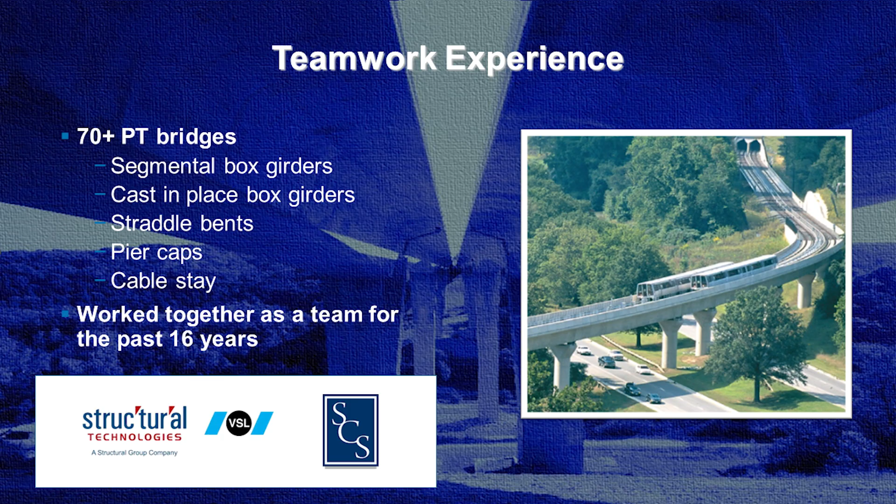So overall team experience, myself personally, I've been dealing with these kind of structures for about 4 or 5 years now at Burgess and Niple. Dallas here has a wealth of experience with over about 15 years with all these different structures, and the testing is what we're going to show you, inspection, construction. He's worked with a team of experts on this for years now, and on these particular bridges we'll be talking about today in these case studies, our team consisted of B&N, Structural Technologies, and SEVA Corrosion Services.

So with the scope of services, in the first phase, there were 11 bridges total that we looked at. What we wanted to do with those 11 bridges was an assessment based off of inspections. So we did visual inspections, kind of what you would do with a normal routine or in-depth inspection on a bridge, to determine which bridges we were going to take further into those other phases and do testing, NDT, and invasive testing.

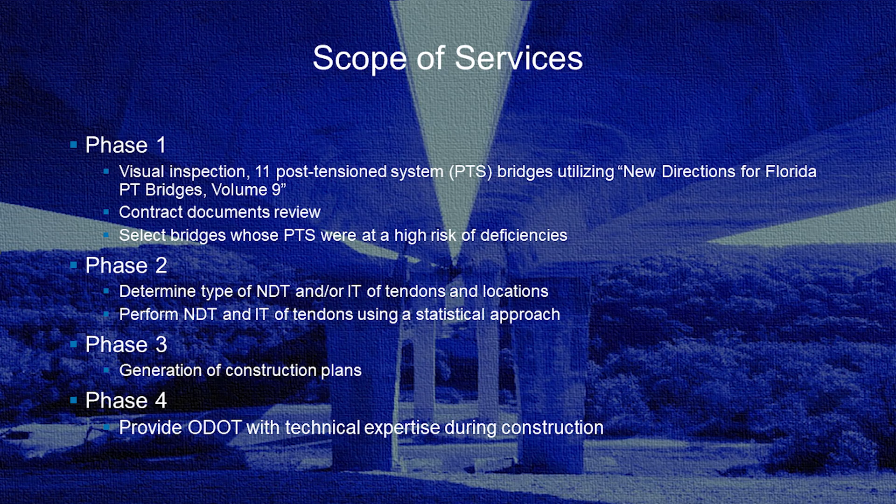And that led to phase 2. So after we picked those 4 bridges for that testing, we went on and did generation of construction plans for rehabilitation. Then after that, we also provided expertise on the construction process during the repairs of each of those bridges. This slide just shows you the 4 different structures.

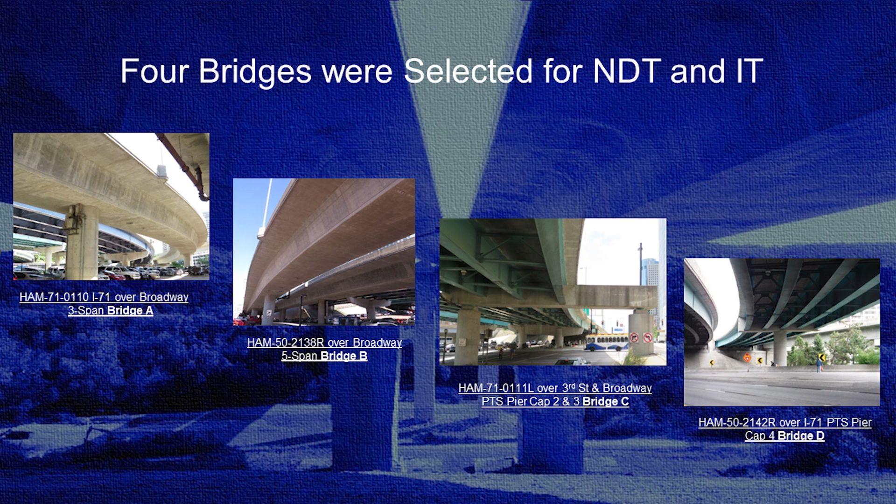I will be talking about bridges A and B, which are post-tension box girders, 3 spans and 5 spans. And then there are also a couple of structures that had post-tension pier caps that Dallas will be talking about more. These bridges are all located right in downtown Cincinnati.

Cincinnati Red Stadium is right there in ODOT's Ohio Department of Transportation's District 8. So I'd also like to thank ODOT for this project and this opportunity to work on it. Brandy Collette, the district engineer, was a big help in the whole process of developing this project and working with us. He was great as well.

So here, this will just show you a breakdown of the post-tension tendon profile on one of the bridges. This is the 3-span bridge, Bridge A.

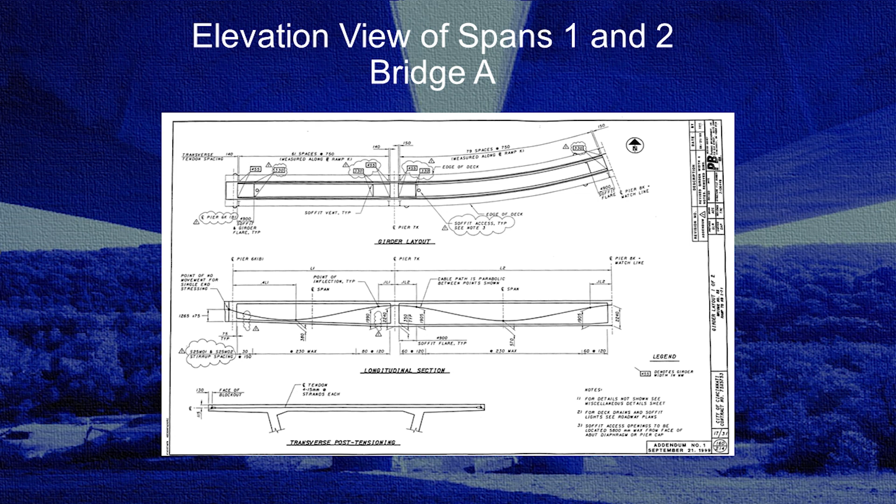So what I want to highlight here is if you look at where the pier would be, where that high point of the tendon profile is—when I get into the testing phase and explain it, we try to get as close as we can to where that high point of the elevation of that tendon profile is. Also, we do the same thing at the anchor. The anchor isn't as high as where it is over the pier, but we try to get as close as we can. You can see the highest point is actually not even accessible because it's right below the deck, right where that pier diaphragm would be.

Now, why we do this is when they're grouting, they start from the low point and then push it up. So where your voids and problems are going to develop is right at that highest point where air pockets can form. And it's right below the deck where cracks can occur and cause moisture infiltration of different contaminants into that duct area, causing your issues if you do have voids in the grout.

The other thing with the pumping process is ventilation. I don't have the vents labeled here, but nowadays they want to try to vent it properly and put one on each side at least, so two vents. In the past, they've only used one vent, and the problem with that is if you pump it over that hill, you just have that one vent, and you're not sure if you're completely filling that air pocket up there—you just don't know unless you actually check it.

And in the past, they haven't checked it, so that's why we focused our testing in those particular areas. Getting into the testing process, we're on the inside of these bridges now. This is one of the box girder bridges, and on the left picture you can see yellow lines.

We use a handheld GPR unit to lay out where the rebar is so we don't cut into that reinforcing steel. The red line highlights where the crimped steel 4-inch diameter duct is, and we try to pinpoint the center line of that duct. Then, on the right picture, after we find the duct, we avoid the rebar and drill all the way down into the duct in the web wall.

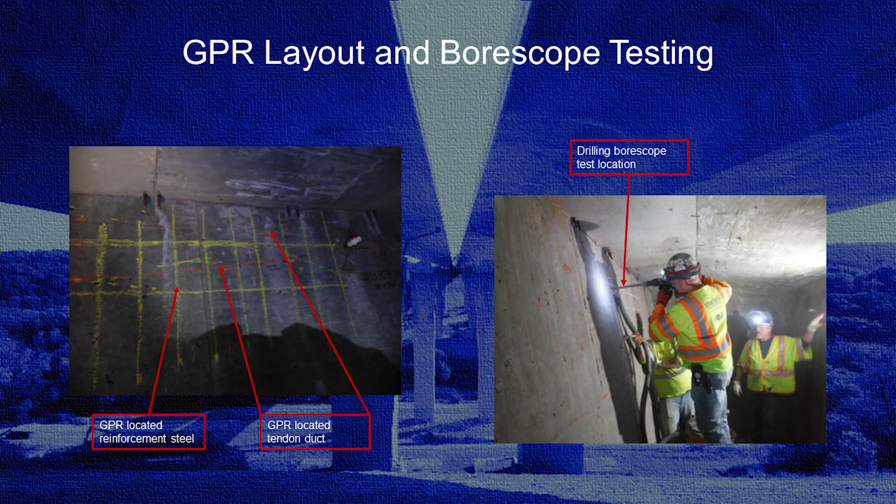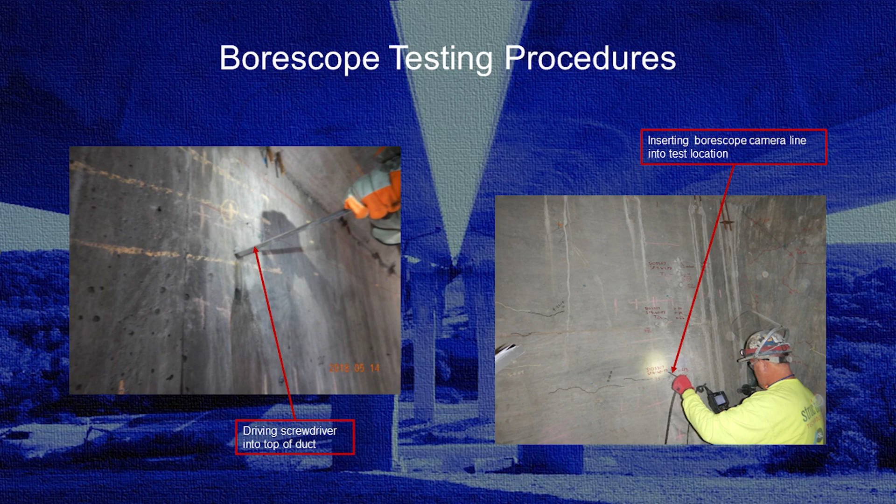After we locate the duct and get to it, we use a hammer and flathead screwdriver to pry open the duct. Then we use the borescope insert to do a full investigation of the existing conditions around the duct, the cables, and the grout.

The picture on the left is a duct full of grout, so you can always tell when they're hitting on it. When it's full, you don't get that little thump and fall into it, but you can see that happen if there is a void. If there's a void, that allows us to do more in-depth analysis with the borescope, squeezing it in further to see exactly what's going on, especially whether the cables are exposed.

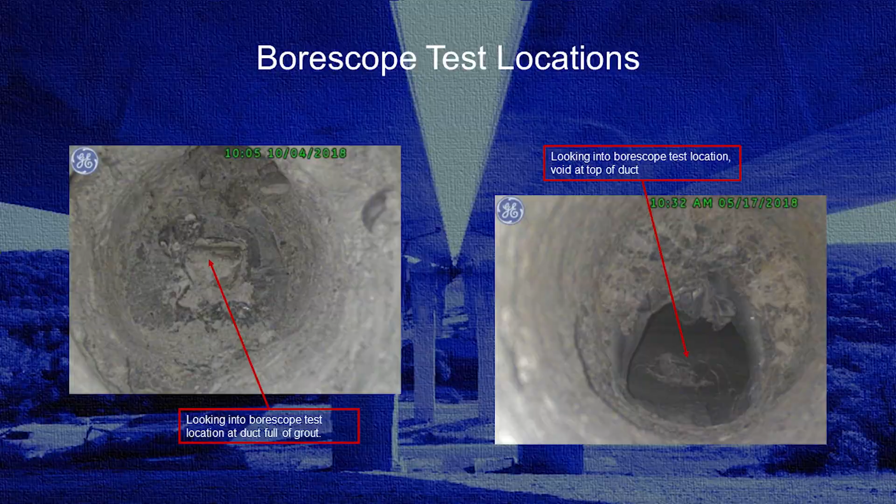This slide shows the initial development stages of a bit of corrosion, especially on these exposed cable strands. The issue is, if you're a bridge inspector and you see this light corrosion, you might just call it condition state 2. But the problem is this is corrosion on post-tension strands, not mild reinforcement. Since they see all that tension, it's not an issue yet, but if that corrosion keeps advancing and you get pitting and section loss, these strands are much more prone to failure than mild reinforcement would be.

This is one of the reasons we're showing you this, why we do this invasive or non-destructive testing, to try to catch these issues before they get out of control or out of hand, when repairs or remediation would be very difficult to do.

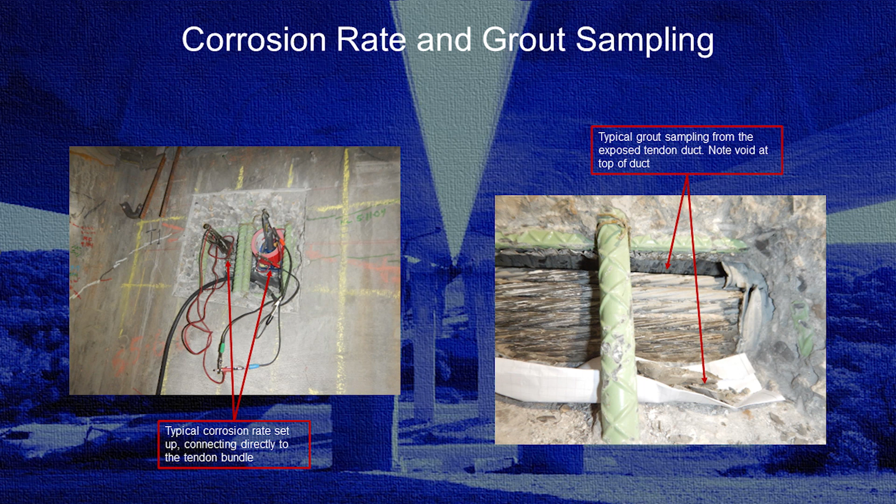On the other side, if there's grout there, we chip off a little bit of grout and collect it for sampling, usually taking it back for lab analysis. We'll test for chlorides, sulfates, do petrographic analysis, carbonation, pH levels, and a bunch of other things. We'll do this at a few different areas of the bridge, usually at least 2 or 3.

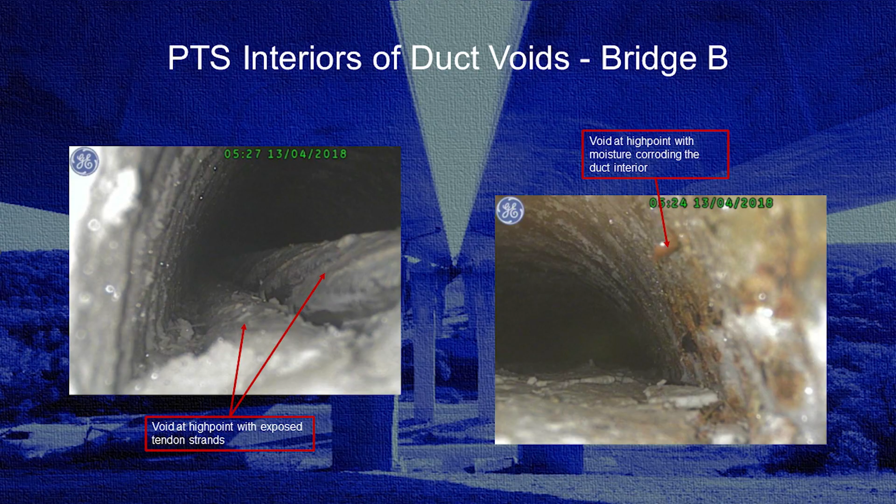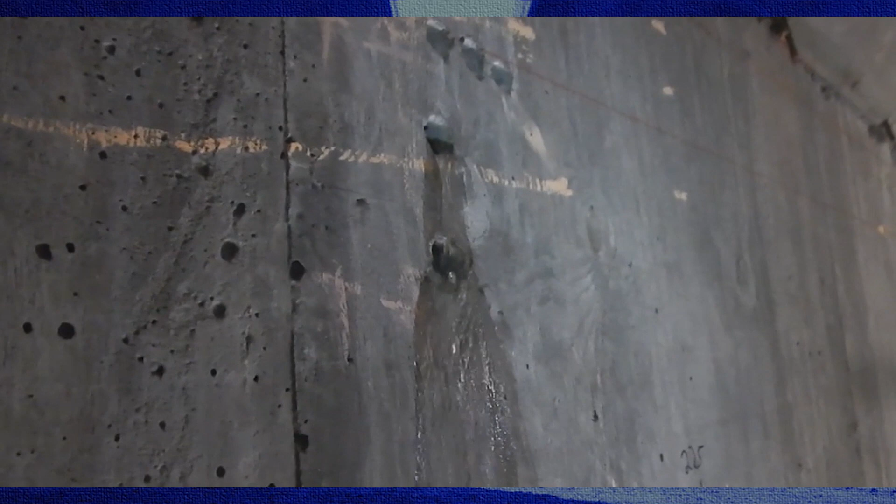So we discovered this, and we deemed it the Niagara hole, as we like to call it. When they drilled into the duct on this one, this was Bridge B, the 5-span bridge, water poured out for 5 or 10 minutes, probably around 5 to 10 gallons. It just shows you never know what you're going to find. The water looked mostly clean when it was coming out, but it just kept coming and coming, and there's a lot of water in there.

So summarizing the overall conditions, what we found in Bridge A in particular: there were a lot of cracks in the deck and the box girders themselves. So why that happened is we discovered, after looking through the plans, that they used a lower strength concrete, and that's why a lot of those cracks developed initially post-construction.

The chloride and sulfate contents were at normal thresholds, nothing too alarming there when the grout went back for analysis. There's also a high pH found in the grout, which is good when you get that high pH and it's not seeing carbonation. That produces a passive film on the steel strands themselves and adds another extra layer of protection if there is grout around it.

So we did full testing on all the high points on this bridge, and we found that over 50% of them had voids. These voids, we determined, basically have to be at least a quarter of an inch so we can fit the borescope in there. And then we found voids, as you saw in some of those pictures, that at least half the duct was exposing those steel strands in there.

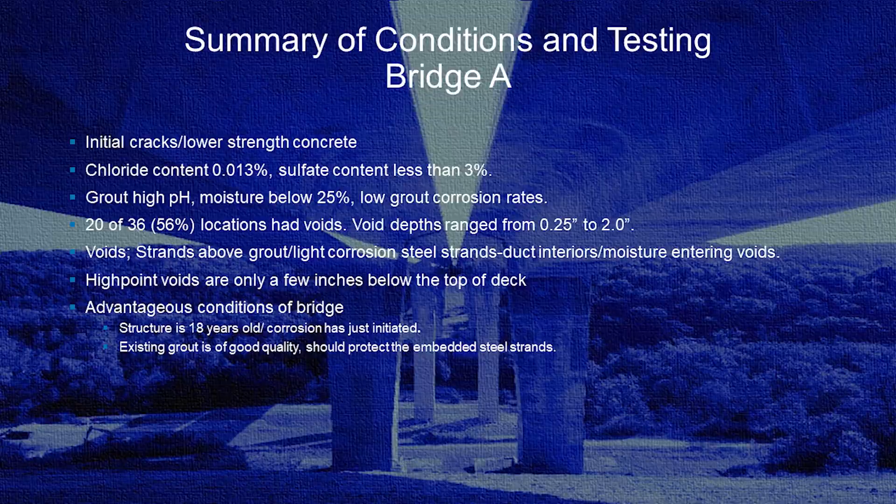The good thing about this bridge, though, is it's only 18 years old, and like I said, we didn't find any worse corrosion on the strands than what I showed you in those pictures. So by finding those right away, that gives plenty of time, and you can develop a good plan of action after we commence our testing for this bridge.

Also, the grout that we found was of good quality. The contaminant levels were normal, and same thing with the pH, as I mentioned.

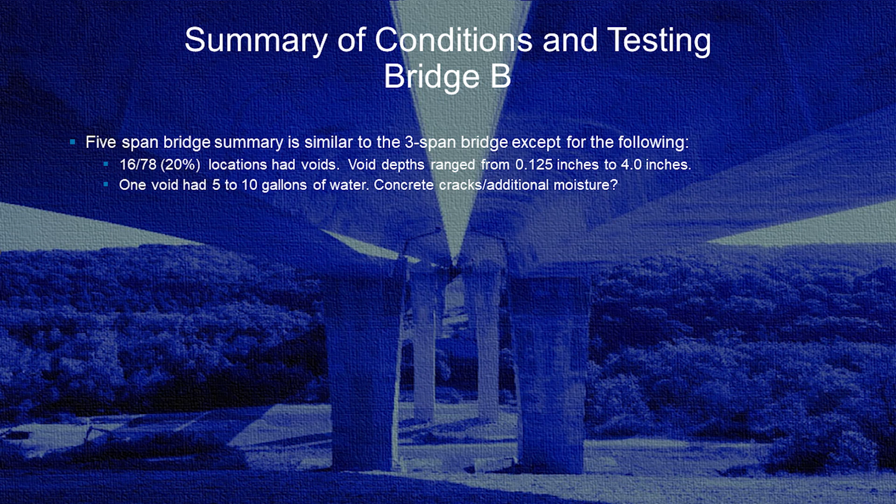Similar things we found for Bridge B. The video was of this 5-span bridge that had the Niagara hole. We found fewer voids with this one, only 20%, but we also found some voids where there was basically no grout inside of the duct, and the entire diameter or full size of the 4-inch duct was exposing those strands.

So after finding our conditions and doing our testing, we decided to come up with some recommendations to help prevent any further corrosion of the PTs in the bridge and mitigate the issues that we found.

So what will help with the deck, if there is cracking, is to add some type of sealant or flood coat to prevent any more water or contaminants from getting through there to reach those ducts. And then obviously that's your outer protection layer, the concrete surrounding the encased duct. And then you have the duct itself, which is the crimped steel.

The problem with the crimped steel ducts nowadays is that they're not exactly watertight or airtight. So it's really key to make sure that everything around it, especially your concrete surrounding the duct, and then inside of it with the grout as well, is fully grouted, and the grout is of good quality, protecting those strands.

So with the voids that we found, we're going to do remedial grouting, and for that we usually use current ASBI and PTI specifications.

Since we performed basically all the high point borescope testing, if you perform all the remedial grouting that you need to and find all the voids, then no further borescope testing would be needed. We want to try to do corrosion rate analysis and grout analysis every 10 years or so to check for carbonation reaction in the grout again.

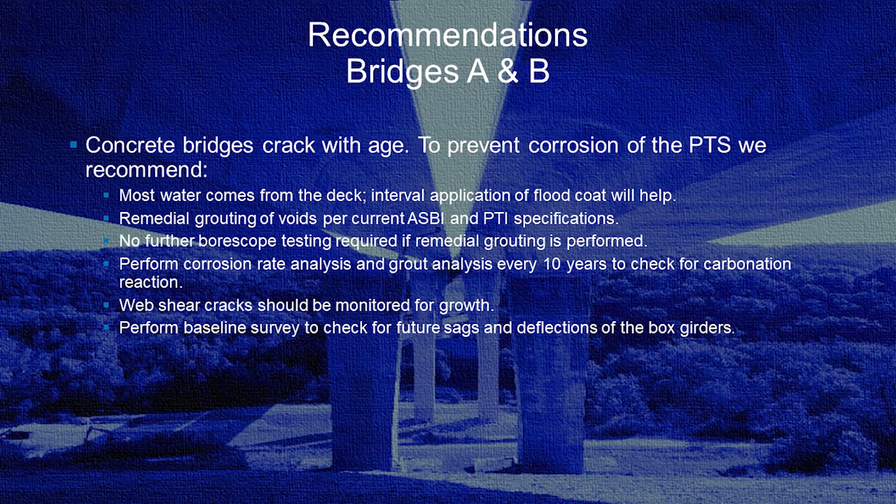Bridge C consisted of Pier 2, Bridge D consisted of Piers 3 and 4. We have a similar situation. The tendons run longitudinally along the length of the pier caps, in this case from south to north.

Again, you like to try to test at the high points, because that's where, if you have voids, the water migrates to if you got too much water in the grout, and it forms a void once the water rehydrates back into the grout.

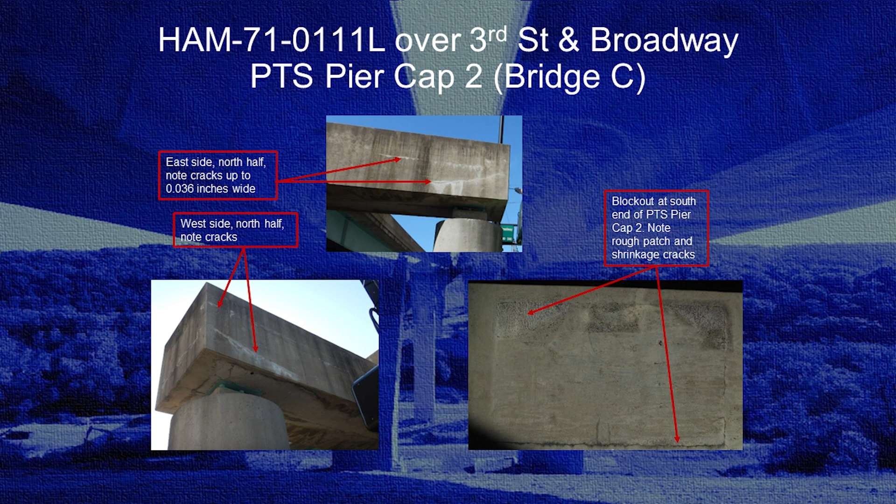That did not happen. They used regular concrete, so essentially there were shrinkage cracks around all of the blockouts at all three piers, or six ends total, because each pier of course has two ends.

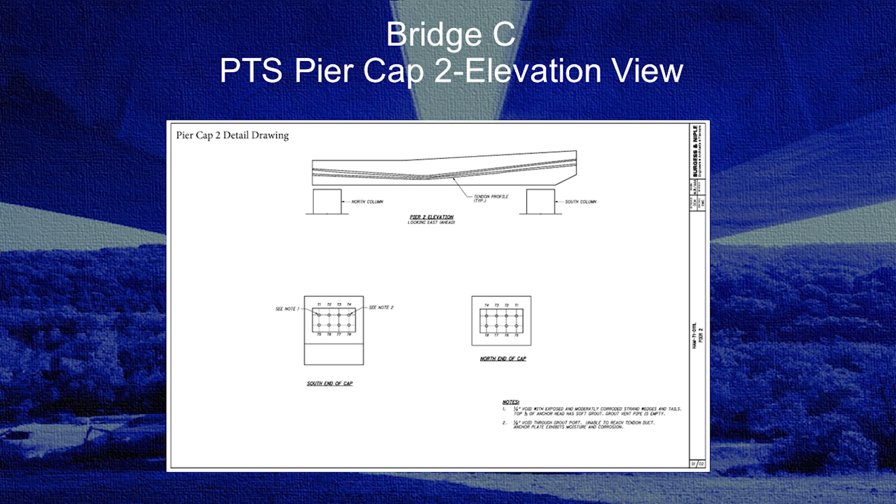This is just a rough diagram of Pier 2 in elevation view. This is a picture looking east on the west side. The left side is the north side, which is a little bit of a higher point, but not the highest point. Normally we would check the south end, which is where the high points are, in the most likely event of where the voids would be.

But for Pier 2, and I'll get to that in a minute, this is what you're looking for when the grouting operation is complete. During the grouting operation, and shortly thereafter, if you have bleed water separate from the grout, the water is of course lighter than the cement itself, so it's going to go to the highest point, and it can form a void.

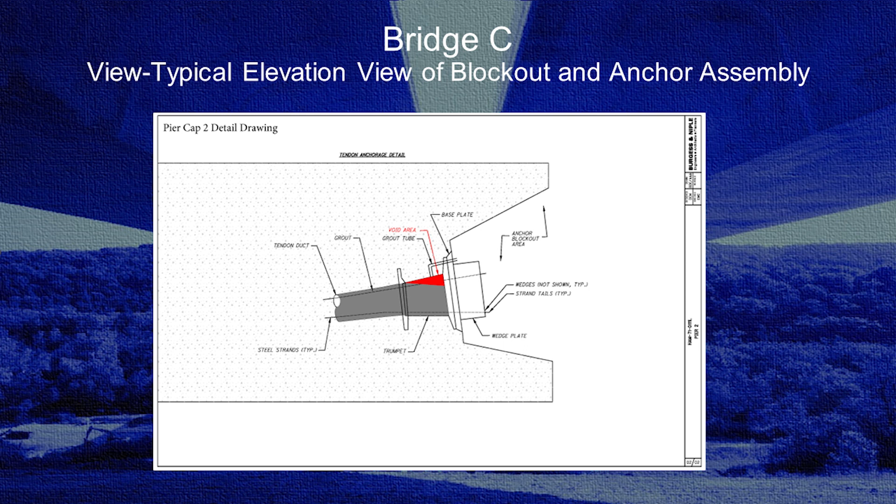Once that grout sets up and hydrates, the water then rehydrates back in, and you're left with a void right where that red area is. In Pier 2, the grout port that we show at the top was completely empty, and we'll show you a picture of that in a minute.

Due to the fact that we had a lot of cracks and efflorescence at the north end of Pier 2, we decided to start testing there instead of at the very high end, which would have been the south end. And when we opened up the first one...

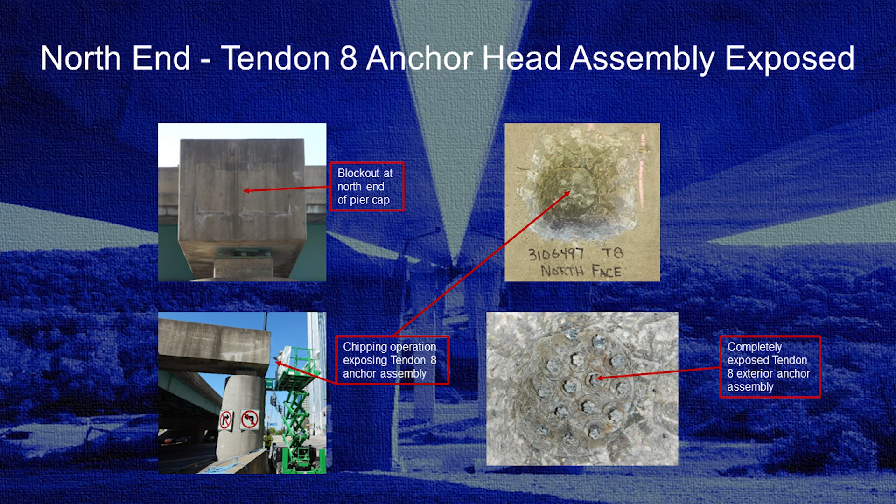That's the picture top right and bottom right. Once we chipped away everything, cleaned off, and exposed the anchor plate, strand tails, and the wedges, everything looked really good. Although we knew we could come back here, we thought let's go to the south end where the two high points are and see what happens.

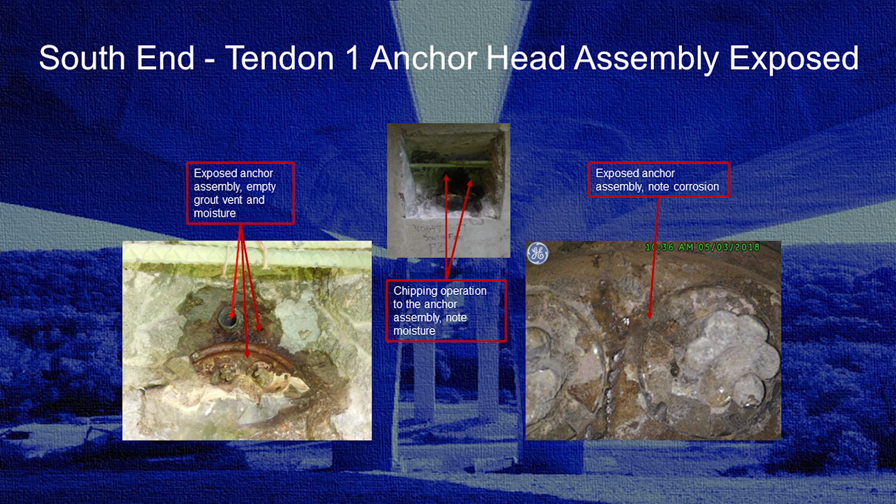And this is what we saw. These pictures don't do it enough justice, but essentially we've exposed the anchor plate, strand tails, and wedges. In the picture to the left, you see the grout vent, which is completely empty. We'll take a closer look at that in a minute. All of the dark areas in these three photos is moisture that had flowed in between the regular concrete of the blockout and the concrete of the pier cap.

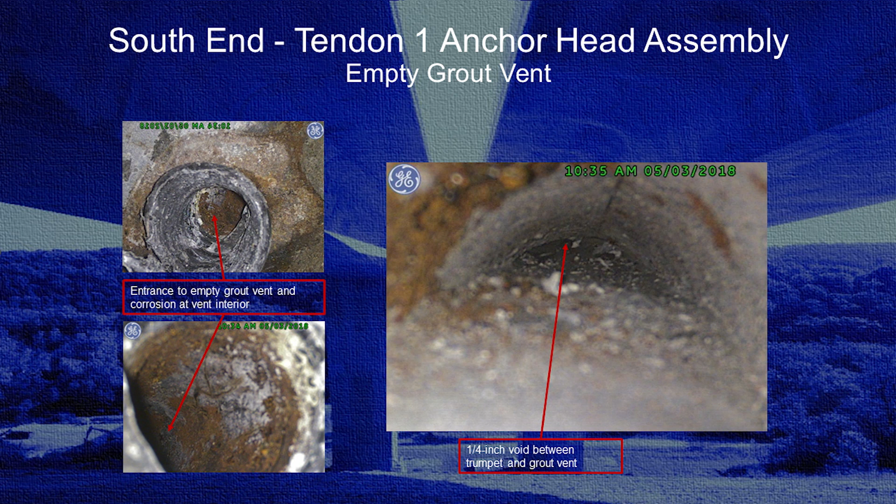The picture to the far right, you can't really tell because it's a two-dimensional view. But at the bottom of it is a 1/4 inch void. So it didn't have a very big void, but we don't know how much water has entered into here. More than likely, given the state of the grout vent, there probably was just beginning to be a lot of water flowing into this particular area, but probably not a bad situation at this point in time.

So the summary conditions of testing at Bridge C: we tested 4 locations. 2 of the locations had water infiltration and corrosion deficiencies of the anchor wedges and strand tails. That accounts for about a 50% potential deficiency rate. You've got 8 tendons in Pier 2, giving you 16 anchors. If you extrapolate that out, you potentially have 8 locations that could have deficiencies.

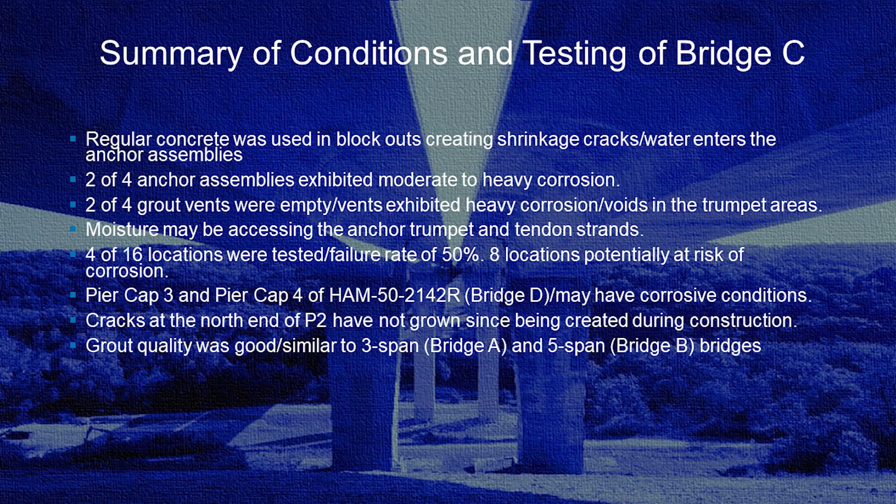Now, at this stage of the testing, we could have gone ahead and said we needed to chip out all of the concrete in the blockouts at all 16 locations and check everything. But that's a very extensive operation to do, and it's really an operation that's much better to do during the rehabilitation than during the testing, because chipping them out and putting them back properly, as you'll see in a minute, is a pretty extensive operation.

So our suggestion to the client was: don't spend your money doing more testing here. Save your money for the rehabilitation, which I think they greatly appreciated because everybody never has enough money for anything. So they were pretty happy with that suggestion, because at all 16 locations you've got the shrinkage cracks, and you're going to have eventually water one way or the other flowing down into those anchor areas.

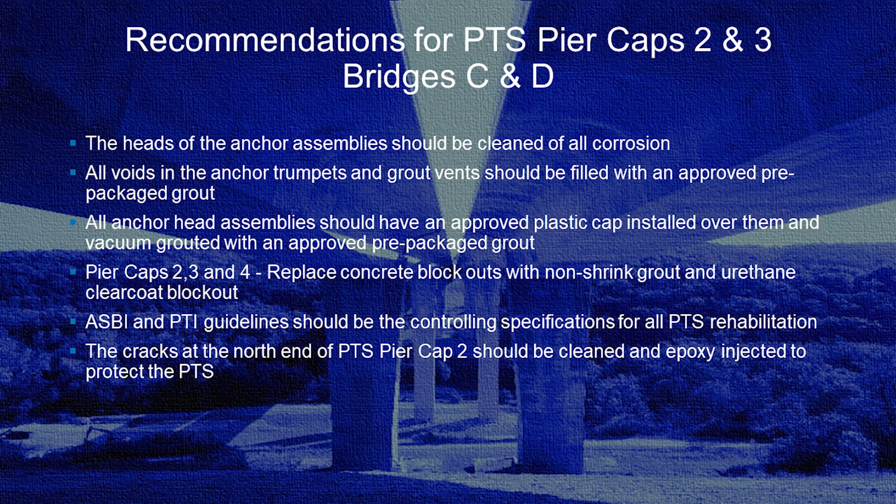So the recommendations for pier caps 2, 3, and 4 at bridge C and D - this was our initial recommendation - is that the total blockout concrete should be removed, the anchor heads and so forth should be totally cleaned and inspected. Any voids in the anchor trumpets and the upper portion of the anchorage should be completely filled. All anchor heads should have an ASBI and PTI standard plastic cap attached.

You would then fill that with a thixotropic grout to completely seal it. Then you would take the outside and use a non-shrink grout to pour that blockout back in, and finish off by covering it with the urethane coating. Now that would be our normal recommendation, but after talking with the client and going back with several different options, we decided to go a different route, which I'll cover in just a minute.

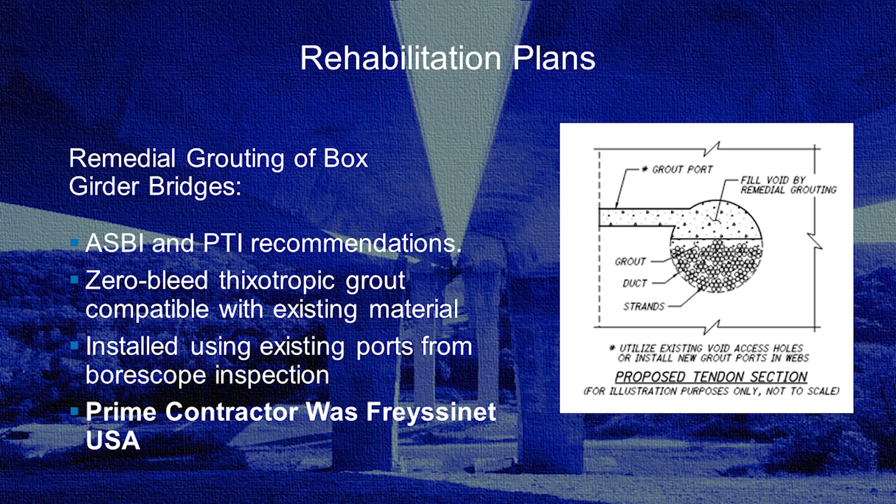Our rehabilitation plans for bridges A and B, box girders, essentially followed the PTI and ASBI recommendations. We used a thixotropic grout compatible with existing material, which our laboratory analysis said was okay to use. We did remedial grouting plans for all the voids. The prime contractor that performed this work on all 4 of the bridges was Freyssinet USA. And the rehabilitation plan - this is just for piers 2, 3, and 4.

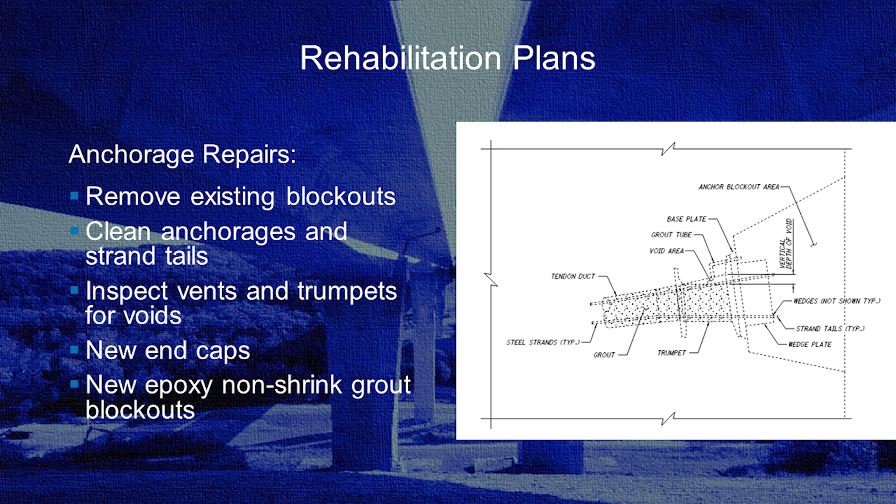We essentially called for the list of a normal repair operation for that. But the problem we had is we could not check into the sides of the pier caps because the tendons were so deep, we would have done the patient more harm than good by doing that.

Since we couldn't test in there, the decision was made that instead of filling the new caps with grout, we would go ahead and use Vector's corrosion post-tech system, which is a very low viscosity fluid that is pumped under low pressure from one end of the pier cap, and it's pumped all the way through, goes in, impregnates the strands and the concrete around it, and then comes out the other end. Usually takes about 24 hours for that to happen.

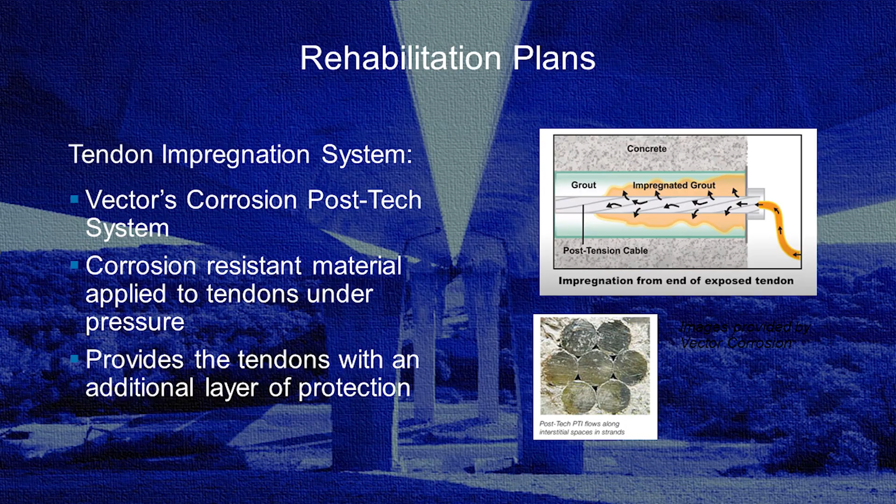In laboratory and research projects, we've found that it does prevent corrosion of the steel. It's still a relatively new product, so only time will tell, but it holds a lot of promise. So the client felt very comfortable saying, let's go that route.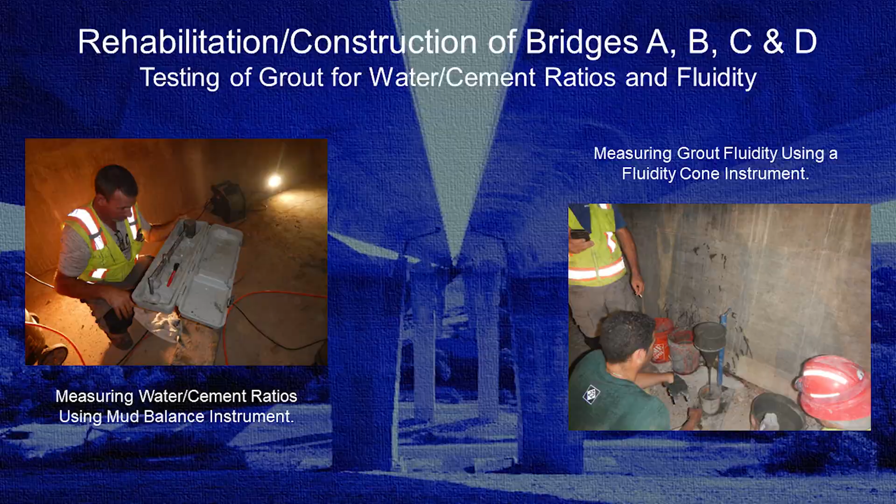The picture to the right is a flow cone. You want the grout to be fluid enough to reach into all the corners and nooks and crannies of the cavity, but you do not want it to be so fluid that it's got too much water with it. So the flow cone is a test that we do as well. These two tests in tandem are performed several times during the course of a day.

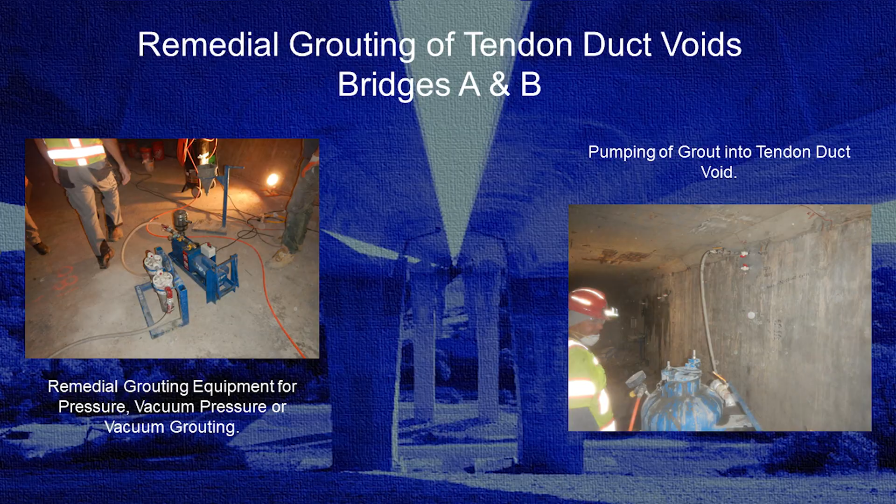This picture to the left is actually the pumping equipment. When it comes to remedial grouting, you have three types of grouting possible: vacuum grouting, pressure vacuum grouting, and pressure grouting. We ultimately couldn't pull a vacuum, so we used pressure grouting at all locations.

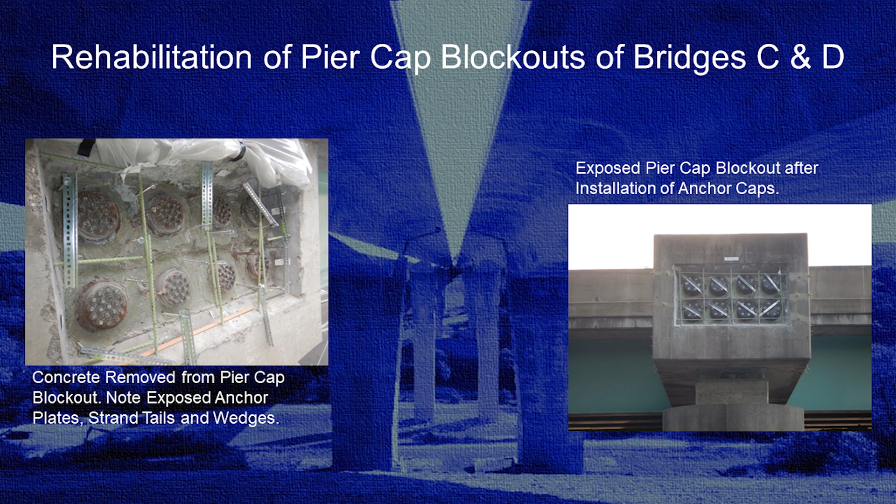So this essentially is setting up the pier caps to be repaired. We did epoxy grouting at Pier 2 to seal those big cracks. This is the vacuum impregnation setup that we used.

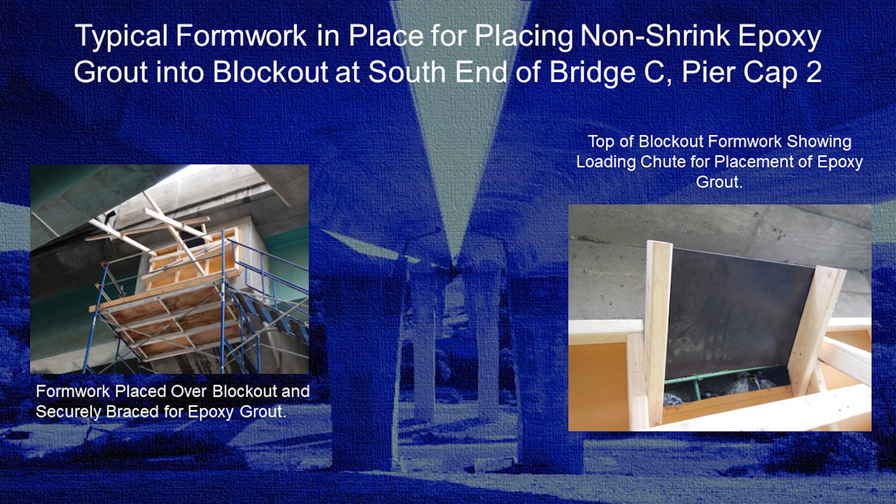After the impregnation was done, we set up forms at all the blockouts, and the picture to the right is a chute where you poured it in there. This is actually pouring the grout into the blockout areas.

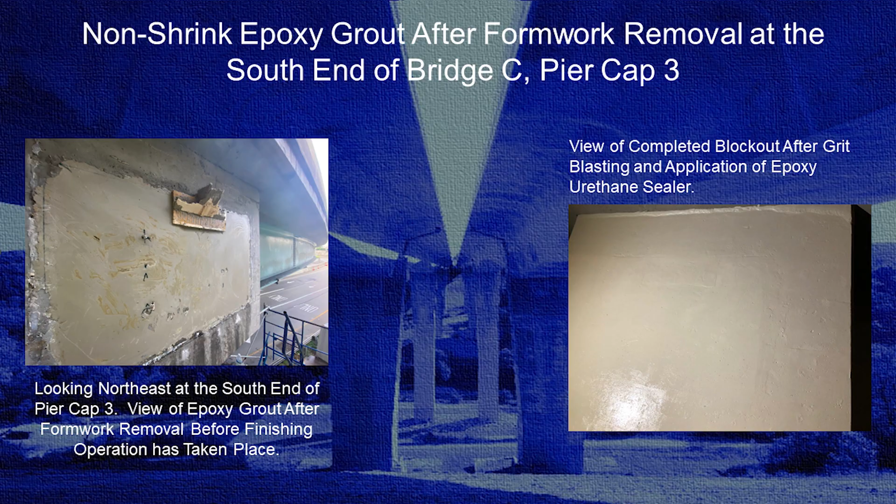Once it's done, the picture to the left shows you what it looks like. It's completely covered the blockout. So that's ground nice and smooth, and the picture to the right is the final product, which is urethane coated several times. Now this bridge is good for its service life, 50, 75 years. The blockouts would be in good shape.

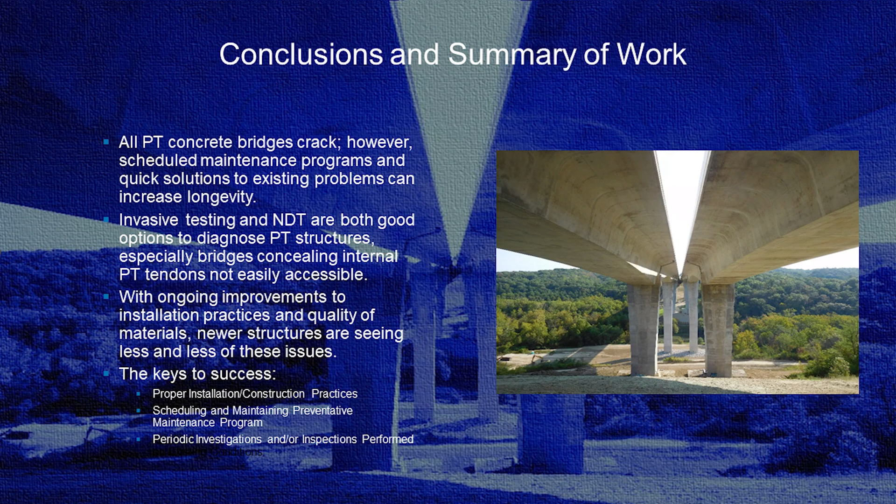So the main thing is, most of our testing happens on 20-year-old bridges or older. When you get to your newer bridges, although you still can have issues, a lot of states have gone to testing at the time of construction, 100% of the potential void locations.

So with that in mind, is there any questions? Did the original construction use thixotropic grouts? No, it did not really exist at that time. This bridge was 18 years, it's 22 years old now, so it was in the early 2000s, so you didn't have it.

During your analysis phase of that grouting depth, do you get an estimate of the volume of void that you might be looking at? Yes, we do, and it's usually not even close. It tends to be higher than what we calculate, because that's very difficult to calculate. Now, grout's not cheap, but the real cost in it is the labor, getting it there. So if you can get pretty close, then the contractor, he has the plans, he can do his own calculations too.

What are the approximate dates that you did the inspection and then the rehabilitation? We did the inspection and testing back in 2018, and then we did the testing later on in that year. Then the next year came around and we did the rehabilitation plans during the winter, and then in 2019 did the actual rehabilitation.

Thank you very much. Do you guys have a booth? Do you have a booth there? Applause for Dallas and Mike.